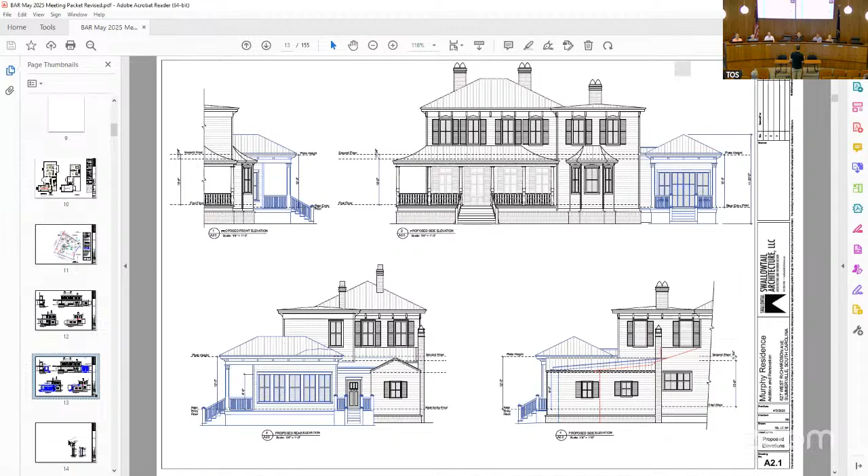Good evening, members of the board. Hope everyone is well. I think from the last meeting, the only question was the balustrade. Dr. Price, I think you were worried about the balusters looking chintzy, more or less. So we added a detail, and I've got a couple pictures if I'm allowed to approach.

This is actually what the picture is - this is my house on Houston Street. It's a little more decorative, halfway. I was thinking more in terms of attempting to match the spindles that exist on the rest of the house.

I don't know how others feel about that. What we talked about, right.

We had asked for something with the spindles with a more graceful shaping. These are still the square ones - I would not be comfortable with those going up. That was what we had talked about the last time we met with you. So, options for other folks?

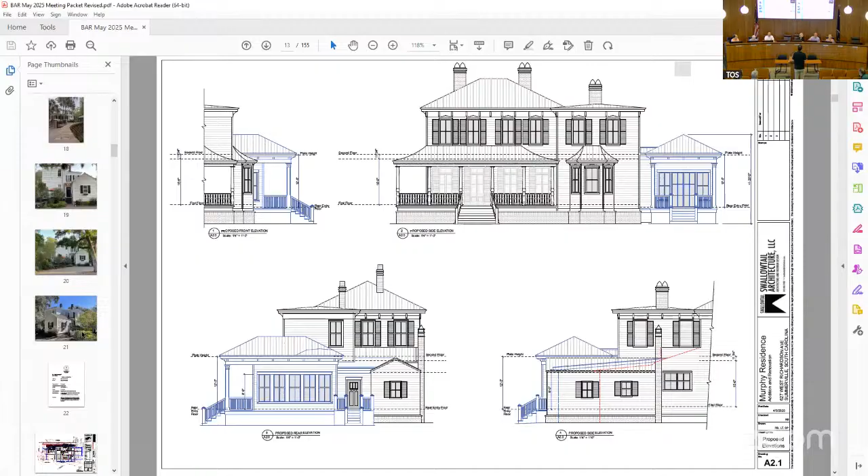He was asking when I was saying Berlin G Myers, what did that mean? Your flyer was just from Berlin G Myers - it could've been from anywhere. Yeah, it was off their lumber profile, their catalog, their molding catalog. I figured if she had a question, everybody else out there might have the same question.

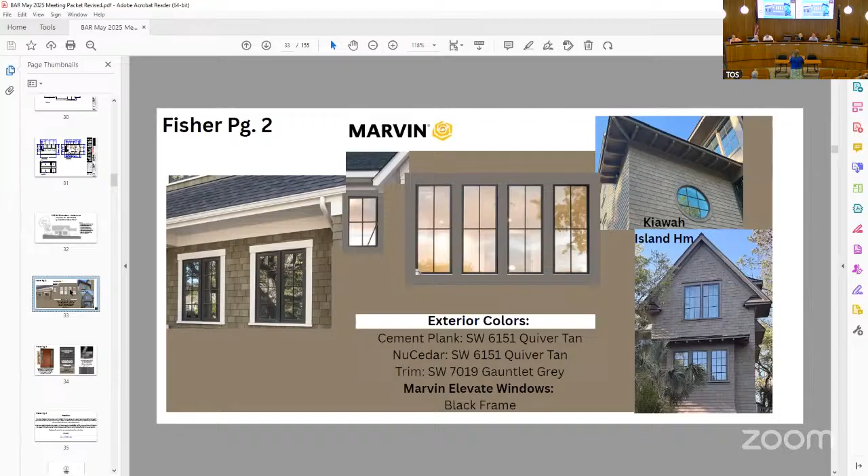Okay, so y'all go back to that elevation again. I think the NuCedar product is a good looking product. Thank you, I was wondering though, see how it kind of continues all the way down to grade in these elevations? Otherwise that band would need to continue all the way around. Yes, potentially, I think that may be more attractive, actually.

And if your builder's not liking it, would you mind that recommendation? Does that bother you? No, we would. So your recommendation is yes, as their recommendation, or like this?

There's a reason that structurally they had requested it not go all the way to the ground, and I think it had to do with the potential of wicking or moisture. So their concern was that it went all the way down and there's access to moisture. So they had asked us to bring it up to be consistent with the stucco foundation on the elevated slab - I mean, the raised slab.

Hey, can you go to the front elevation? Tim, are you asking that the stucco comes up? Yeah, so see that band right there - that band would continue across here, right here, so the home would come right underneath those windows. And then go to the side elevation 27 again - the same would be true here, and the same would be true here, so just all the way across.

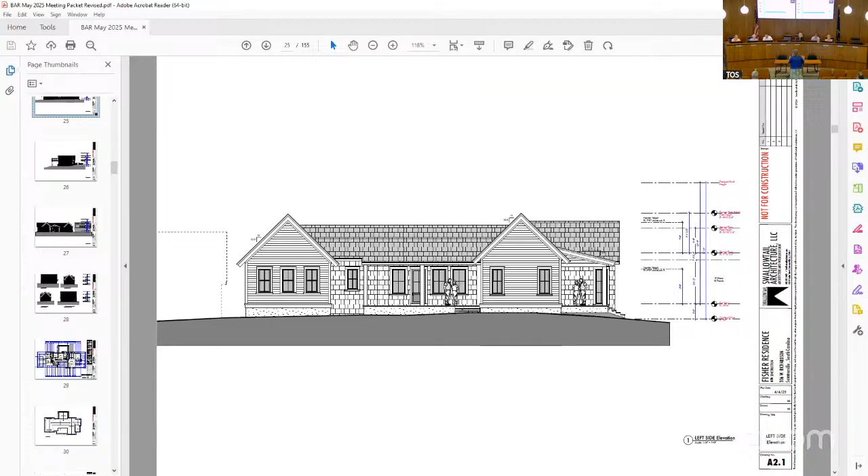Where's a picture of the fence? Page 24, you can see it. But you can see a little bit of that one right there.

Is there better detail or is that all we have? That's the only detail that we have. It's something we can certainly detail out and get to Remy.

What is the material of the fence? The fence would be wood or composite. We'll price that out, but it'll be the color of the house, the brick post.

Then I'd really like to add, not anything crazy, but for the fence, it'd be nice to have maybe a little something nice, some hardware on the gate.

Does the fence go around the whole backyard, or is that excessive? It goes just around part of the backyard - the front and then down partial on the left side until we get to the trees. We've got to yield to the elm tree and some of the other trees over on the left side, so it would break, then pick up and tie back in to like 2/3 on the side.

I would like to see more detail on the proposed fence in terms of the size of the horizontal members, but that doesn't preclude everything else being approved.

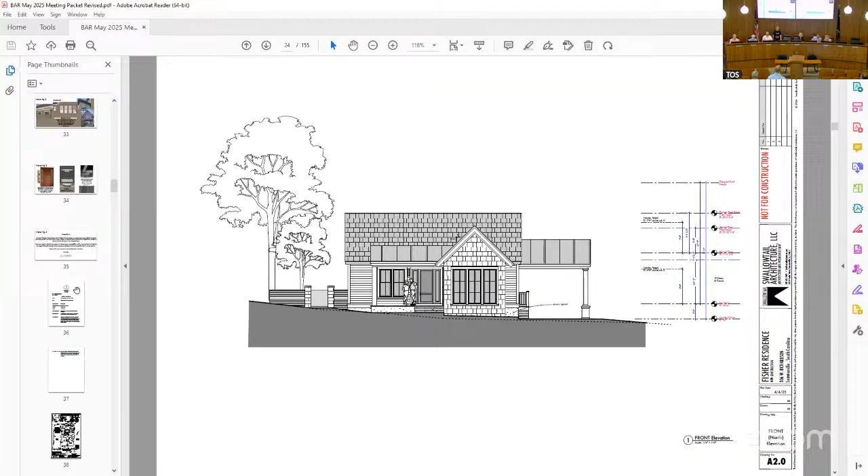Good evening. Good evening. I am back again - took me a few months hiatus, had a lot of stuff going on. But you guys wanted a little bit more detail on windows and doors, trim and everything like that.

I also have a set of plans that I purchased, but right now they're going through Crosby Creations to actually redo them for South Carolina requirements for the permit. Just a couple engineering things changed on it. So I created like a 4 or 5 page summary of everything - the doors, exterior - and wanted to see if you guys had any questions on that.

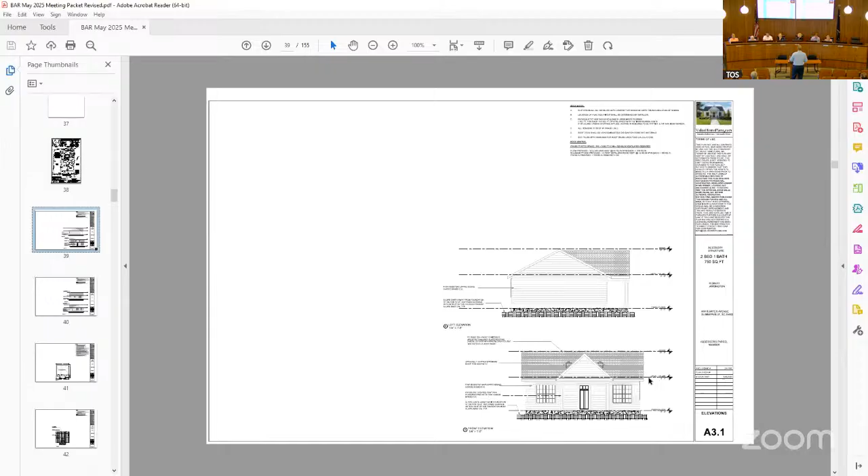I think there needs to be some trim detail on that. On some of your later pictures where it shows individual elements, you do have the trim detail, but on the line drawings they seem to be absent. On those drawings there, or? Yep, okay.

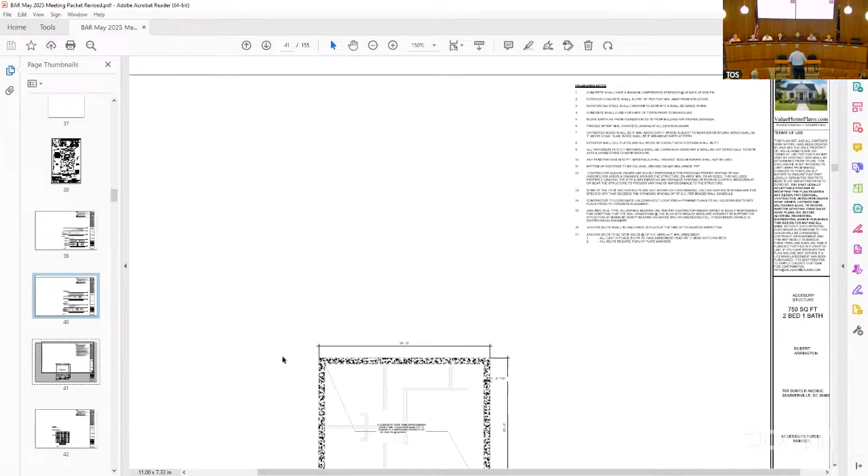For instance, go to page 40, maybe - well, there you go, you got it right there. So we're just saying trim details are on the corners and on the windows. You probably plan to do that anyway. Yeah, yes. So we just need some more detail on those.

Are you firm on where the cottage is going on your lot? I mean, I've got some play. I'm just studying your plan, and there's so much thought that went into making the house very symmetrical, looking from the front door all the way through the back, having the pool lined up so beautifully. But the cottage is off center.

It is, and it's really because of that tree. I wanted it to be center, I promise you. My wife wanted it centered too. But it gets really too close to the root of the tree, and I just didn't want to.

I don't know what's over there on your lot. The back left corner is the lowest on our lot, and it's kind of wet most of the time. There's some river birches that grow there. I mean, I could always fill it up and do it there. I'm not really locked into that. I can move it to the other side, just a little bit more land work to do.

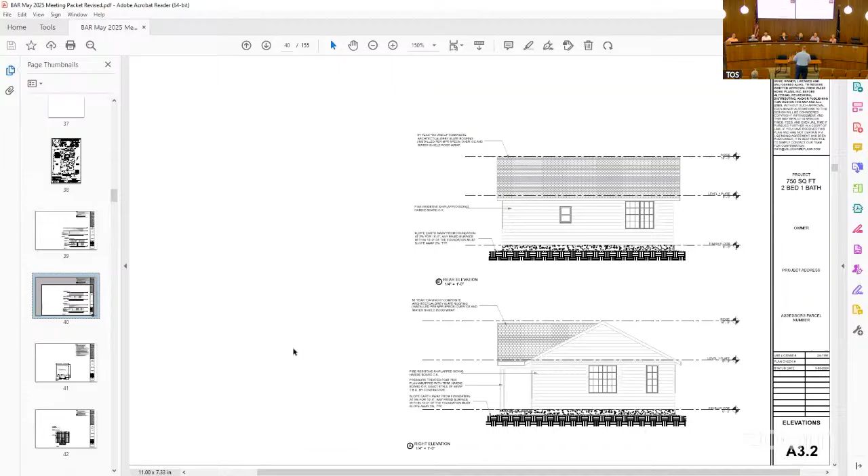I will second your motion. Was that a second? It was a very quiet second. Beth, yes. Kim, yes. Jane, yes. Rachel, yes. Kimsey, yes. Nancy Jean, yes. And I also, yes. Thank you, guys. Thank you. Good luck. Your roofing. All right, me too.

Okay, the Summerville Museum. Hi, good evening everyone. I was here like 2 months ago for approval on my own personal house, so it's good seeing you all again. I'm with the Summerville Museum, 100 East Doty Street.

We and the town have put in a fair amount of money here in the last year to do new flooring, new AC, and we've put in a number of new artifacts and displays. So we'd like to share that with the community—that's what we're proposing.

We went ahead—although, having been in sales, I'd love for it to be bright pink so you just couldn't miss it—but I think the green is more subdued and fits well with the downtown area, and it'll still get our message out as we're hoping. I think it's a great idea to have the banners on both sides—that building does get lost, it's just brick, and gets everything else lost too.

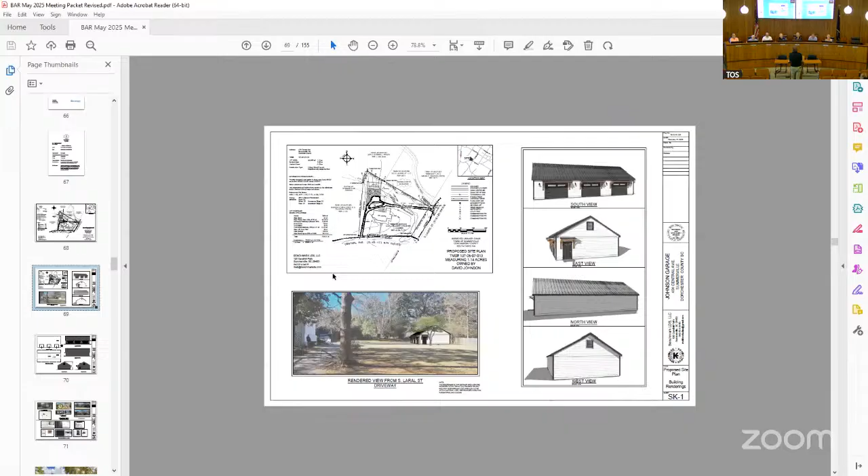That's just a 3-bay garage. It's basic, it's cut and dry. It's the way it is, the way it looks.

So, I do have a problem with the metal roof you've picked. We don't approve a metal roof with oil canning. It's the same metal roof that we have on the house. Of course, it's the old metal roof on the house. No, we require a flat panel with 1 inch standing seam.

Yeah, that's a flat panel. It's got the 1-inch standing seam. Well, the material description looks like it had striations in the metal. I mean, it's as close to a standing seam as I think you could get now.

But there are two kinds of standing seam material. There's one that has a flat panel and there's another one that has striations in the panel. We do not approve the panels with striations. Okay.

So I mean, we could change the roof as far as that. Yeah, I think it's not that big a price difference. That wouldn't be a problem with me as far as changing it to the flat panels. I'm just pointing out what materials we approve, and that's one area that we are pretty strong about, that in order to have it consistent with the old standing seam roofs, the panels are flat and the seams are 1 inch high.

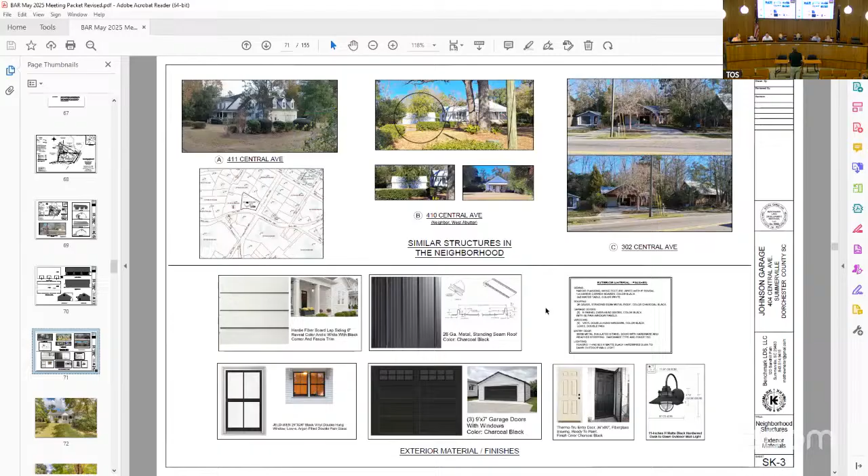Right, and I guess that to me is similar to a flat. That's not similar to a flat. Well, a lot of the ones that... Flat is flat. It's got a little, I don't know what they would call them, between the seams on those. No, we don't approve them. Flat is flat, and I don't think it costs any more to be flat.

It's not. I mean, I was just going by, I've seen some other ones and they have that same panel on the house that I've got now in different areas where they've replaced some of the standing seam that was there, and that's the same thing they've got on it. So that's why I was going with that.

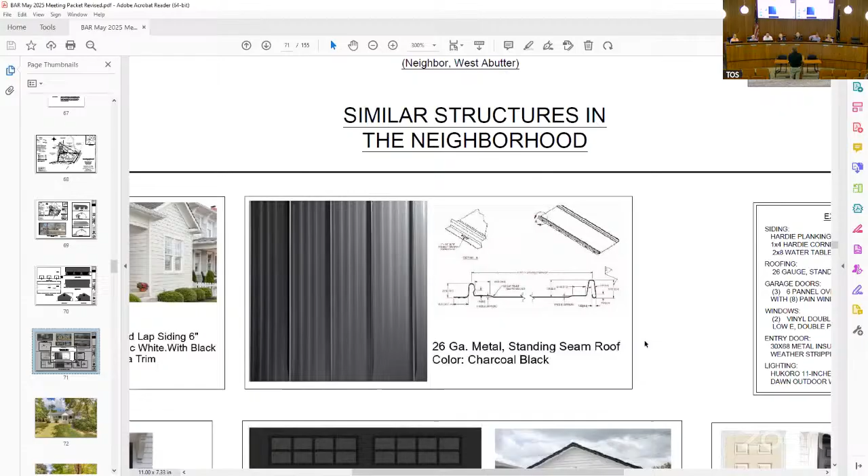Matter of fact, a lot of where they've replaced over the years, I think there's 2 or 3 gables on the house with that same exact tin, over the porch for one. Oh man, on the back.

I take a little different position on this garage. I agree with you on the roof, but I also think the garage lacks any architectural detail. And it is on Central Avenue, it's visible to the public, not hidden behind the house. Highly visible. This looks like a barn with garage doors on it. I think with a little bit of work it can look significantly better than this, and I just don't think the detailing is there right now.

So I'd like to see them put more detail in this to match some of the architectural details of the house. It's a beautiful house, gorgeous house. Pick up some of those details from your house so that this fits in and is equal in quality to your house. I just think this is...

Yeah, the garage that is currently there was approved as a temporary structure. It's just kind of stuck back behind the straight part of the house. Well, it is back behind. It would be hard to see it from Central or Laurel unless you go down the driveway.

But I mean, I thought the garage looked good as far as the detail, and as far as matching it up with the house. The one next door is exactly like that, except it's got silver tin and white doors. Same exact garage.

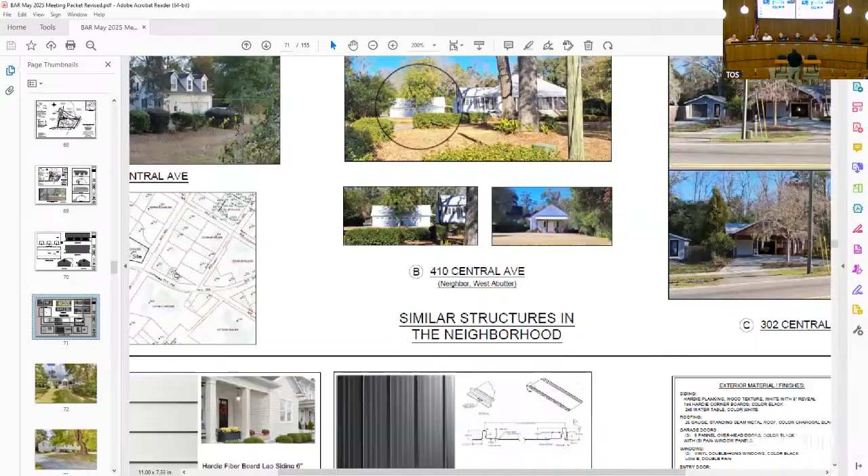Color's not part of it. Maybe the white colors are making them stick out more. You have the neighboring property picture. White doors, put some trim. Yeah, white doors, dark hardware. And that you could see from Central Avenue.

Hope you're well enough to tell. Right, remember that one, it's like I said, it's just basic. But with just a little work, you can come back to us and shouldn't have any problem. Okay, well, I'll raise the roof up a foot but I do like my colors. I hope that'll still go over.

It's some trim. Yeah, I think the garage doors wouldn't stand out so much if they weren't dark. Or it could just be that the roof is too low, and so the little roofs over the doors are black, the roof is black, and then there's the black roof and there's not enough space just between it. Maybe raise that up, and maybe the roofs black and maybe the doors white, makes them all blend with dark hardware on it.

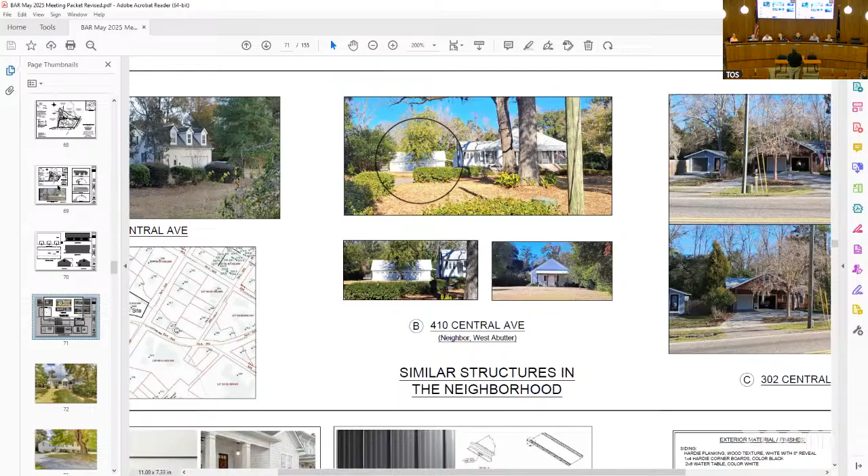And a lot of that might be into the way the drawing is, because it does have a cornice going around it with the 1x6. It might not show it, but it does make it look like it's sitting right down on the doors. So maybe I need to get the drafter to just redo some things on it. I think so, I think that's most of the issue.

We're saying put some trim on the doors and just some additional attention, make the doors carriage style doors. You know what I'm talking about when I say carriage style doors? Yeah, I'm a woodworker, so I know everything about wood. Oh God, you know how to make this thing look awesome then. Well, I could, and like I said, it's a lot of the drafting, the engineering of it, the way that he's got it, but...

It is gonna be a custom garage. It's not gonna be just like the one next door. This is a custom garage. So well, help us make it look great then. Well, we'll do it. I'll be back again. Thank you.

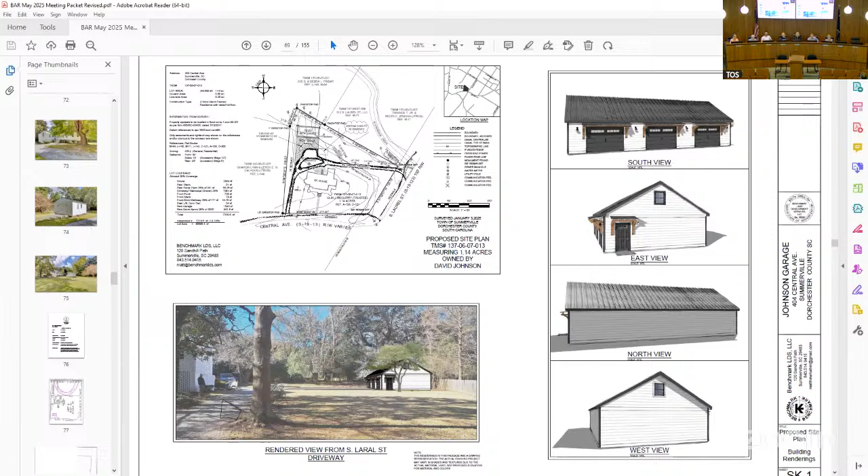Hello board. I'm Sandra King, and I would like to build a garden shed.

So I know one of the concerns is probably going to be that the proposed colors and materials don't match the existing cottage. What I was telling Remy is that I want to put an addition on the house, and then once I do that, I'd like to bring the house in line with the shed. Right now the house is a dark brown.

Are you tired of it? It's been that way very well, I just bought the house. And I love Summerville and I love the lot and I love the trees. But it's just so dark.

Super cute house, it's really cute. It's tiny, it's like 900 square feet. And I'll just go first here, let's get it started.

The shed, I like the shed. I'm not opposed to the colors being different. My bigger question is, you mentioned the roof, we probably need to talk about that, but you've got board and batten. You mentioned that you wanted to change the house to match that.

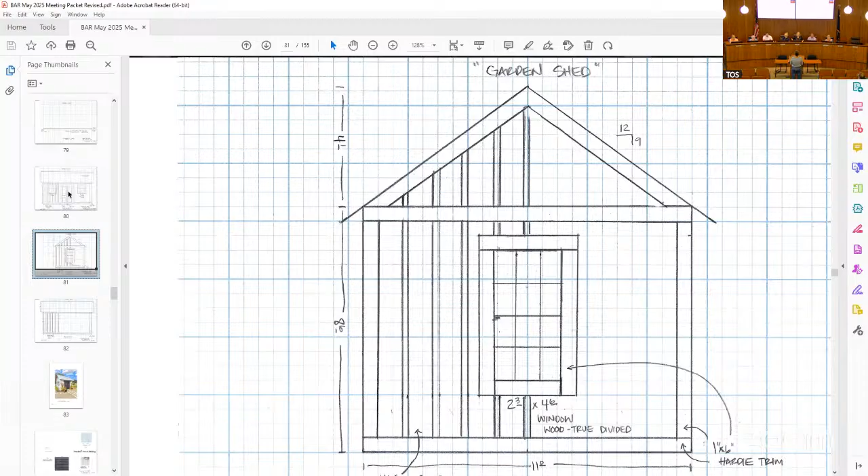Would you be opposed to the windows matching in the front? Are you putting like a bench underneath? Is that what you're thinking? Yeah, it's for storage, so those would be fixed sash on the front. Yes, I'd probably make them so that I could open them this way to let air in.

I understand, I'll put window boxes on the front of it. And simulated divided lights? No, true divided, better. Absolutely, I'm looking for old historical windows right now. Remy, could you show me the site plan?

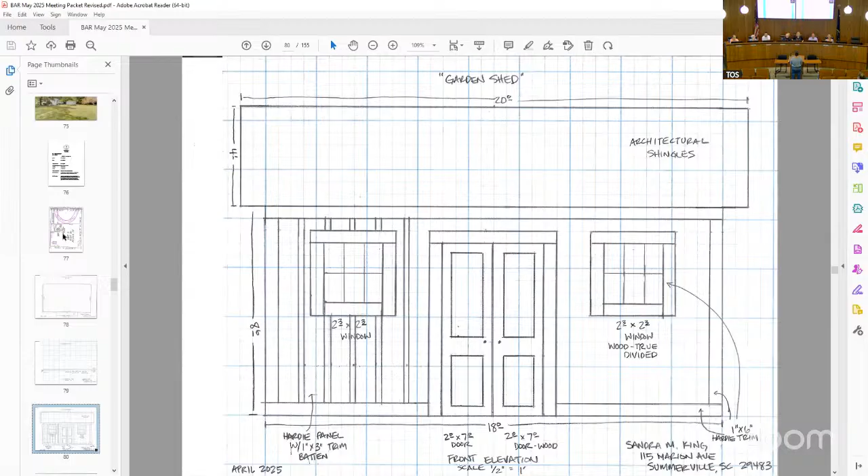So I'm just trying to understand, when I'm looking at this, I'm going to see the front view and part of the side view. So I'll see little windows on the front and a longer window on the side, and the longer windows on the cottage.

Where are you going to put your addition when you do that? So see where the wood deck is on the house? Yes, I'd like to come out from there about 40 feet. And go into the middle of the property? Yes. Okay, so make it like L-shaped. Okay.

So you can't see the cottage from the street. I hear what you're saying. It's pretty lit with azaleas. You inherited a huge fence. Yes, I did.

I'm trying not to let it bother me. Approved and submitted. Yeah, yeah.

Allow her to choose between a shingle and a metal roof if she wishes. I'm okay with metal if you guys want to do metal, we leave it up to you. You prefer the metal? Okay, I think the metal would be nice. It won't be the metal for 100 years, really, but...

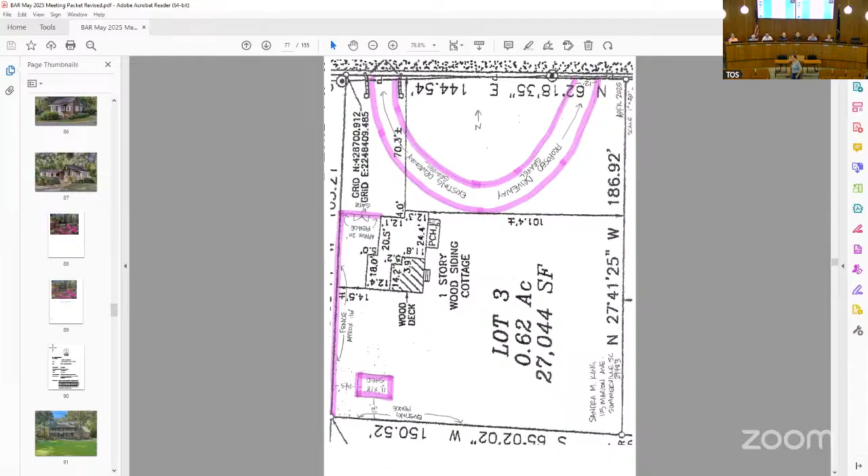Okay, 124 Dorchester Avenue. Good evening. How's it going?

We are proposing to do a replacement window project at 124 Dorchester Avenue. I'm with Window World, and we're looking to put a vinyl replacement window in the home. What's in there now? Just existing wood windows.

I can't tell from the photos, do the windows have divided lights now? They do, don't they? There's two in the dormers up top that currently do, and those four that look like windows on that second floor are actually doors. Oh gotcha, that's what I'm looking at. Those are doors.

So the 1, 2, 3, 4 down low, along with many others throughout the home, is what we're proposing to replace. I believe those dormer windows were not, you're not replacing those. But everything else, yes, all the other windows in the home. And it's all going to be 1-over-1, just a clean, clear plain view in the top and bottom sash, like for like with what's in place now.

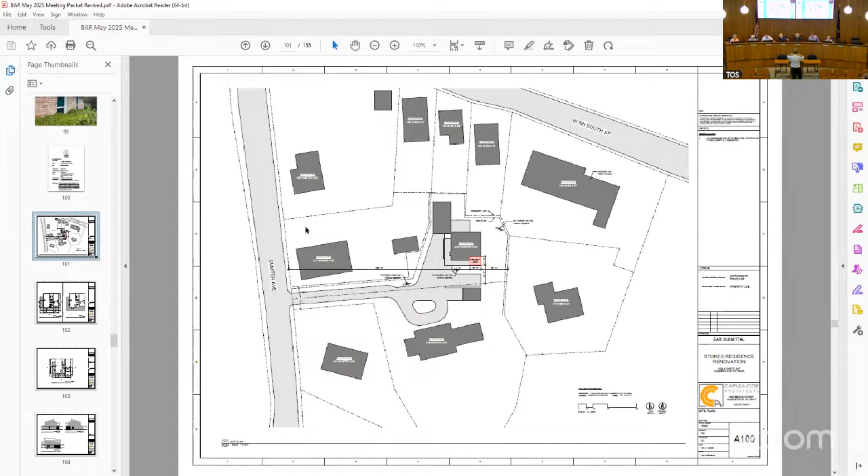The footprint will be the same as it is now. Yes, it's just closing in a portion. There's a 14 by 12 covered portion of the porch that we would just be filling in. So the footprint stays exactly the same.

How are you making it waterproof? You've got an open deck, you've got a deck above. We would have to coordinate with a structural engineer, of course, but we'd probably sister the floor joists and then add flooring on top of that.

We'll have a waterproofing membrane on that deck. It already actually is - they've got a ceiling on the porch, so it's waterproof, like a... I don't know the exact name. I'm just trying to understand. Thank you, I appreciate it. That's good.

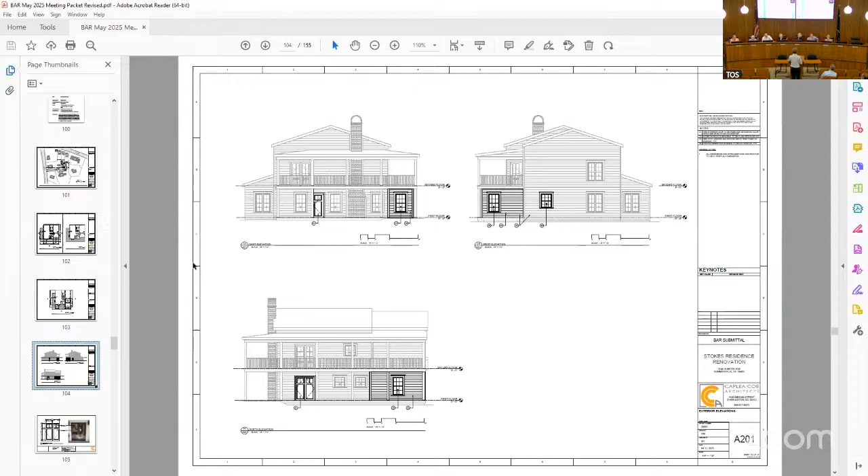I saw where you were replacing some doors. Correct. The owner would like to have added security and privacy to their house, and so our proposal swaps these full light doors with doors that would have additional security and privacy. We still want to maintain the stained wood and match materiality as closely as possible.

Any comments? Nope. Have a motion? Could I add one thing? This meeting, I requested it for BAR conceptual. Could we make a motion for BAR, the final approval? I'm not sure - is that ok? Lenny? Yeah, if the board's comfortable making a decision, you can make a decision on it.

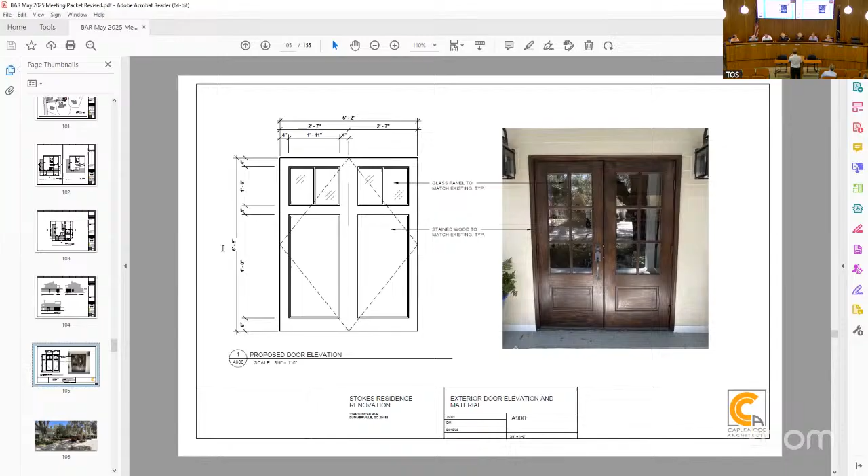I'll make a motion that we approve the change to the door and the addition for final approval. Second. Okay, Beth, yes. Tim, yes. Jane, yes. Rachel, yes. Kimsey, yes. Jean, yes. And I, yes, also. Thank you so much. Good luck. See you.

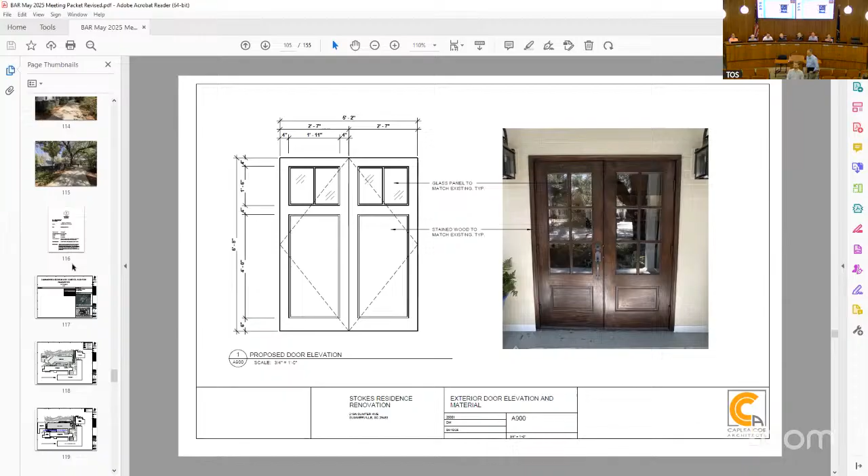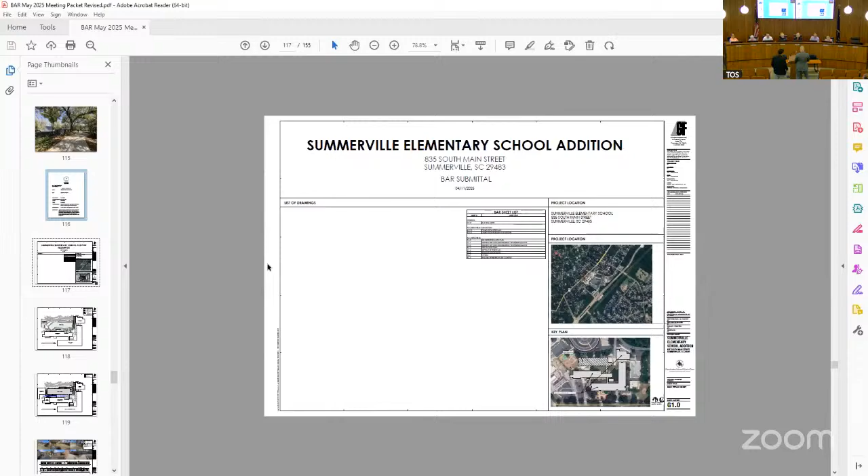Now we get to 835 South Main. Sure, guys. Yeah, so I'm sorry - hi, I'm Michael Kaneda, I'm with Greenberg Farrow. We're the architects with Work District. Had here tonight, our project designer is Jonathan.

If I may, if we could kind of walk through the project and just flip through some of the pages to better explain how we got to where we are. So I'm going to hand it off to Jonathan. Hello, good evening. So we actually have two action items - this is one proposal, but there's kind of two pieces to it. The first would be demolition of the existing wing, and then the second would be the proposal for the new addition.

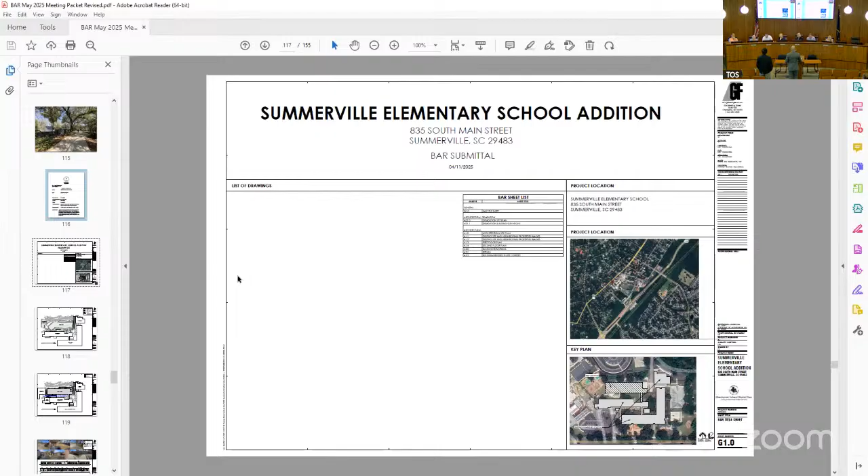So if we go through it, the current wing back there is about 14,500 square feet, 13 classrooms. It's getting old, dilapidated, so they want to demolish it and build back larger for more school capacity. The footprint for the proposed addition is generally the same, but it's 2-story - it'll be 34,000 square feet, 2 stories, and 24 classrooms with some swing spaces and teacher workrooms. Just kind of building up that school to be more useful for the current population, which is drastically increasing.

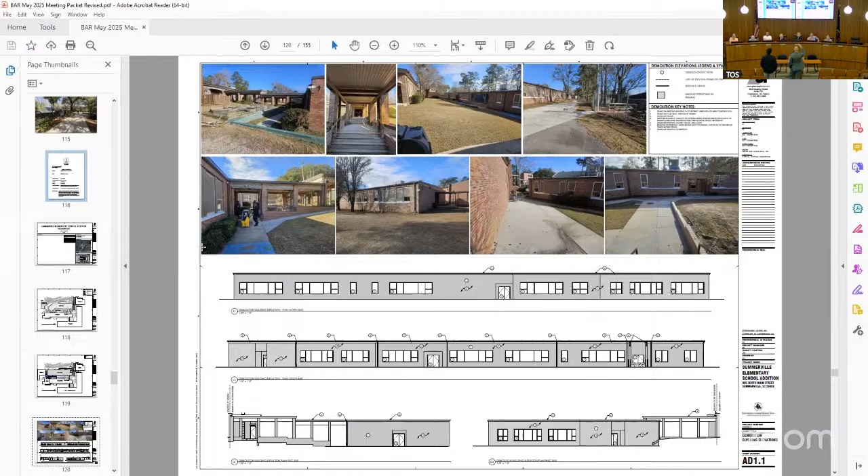So this is showing the demolition of the existing wing and the existing pictures of what that looks like. You can kind of see a little bit of the existing building to stay, and then the back wing that's to be removed, as well as that exterior connector piece.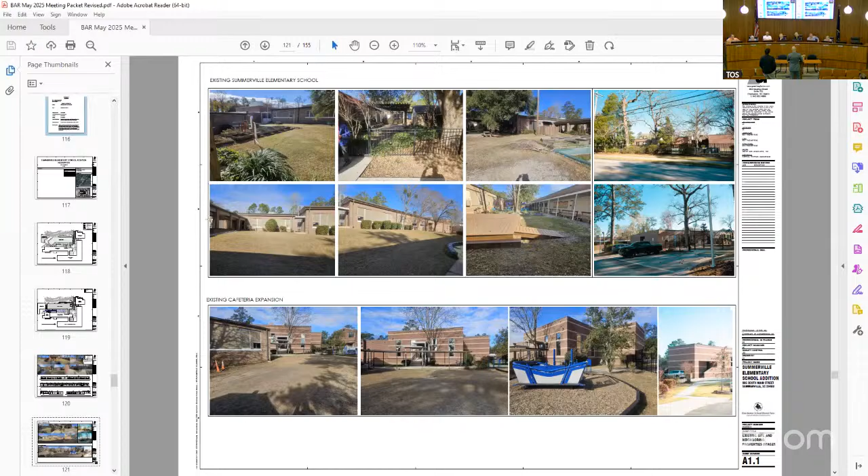Again, this is more just showing the existing photos of the complex. With this school, there's a lot of little additions here and there, got built on more and more as the years went on. So we have the main school, which is a bit older, and then as you can see on the lower portion, is the existing cafeteria expansion. That was originally for the high school, and now it's been brought into the main Summerville Elementary School. Then if you go to the next one, we show another addition, which is the multi-purpose room, done in 2014.

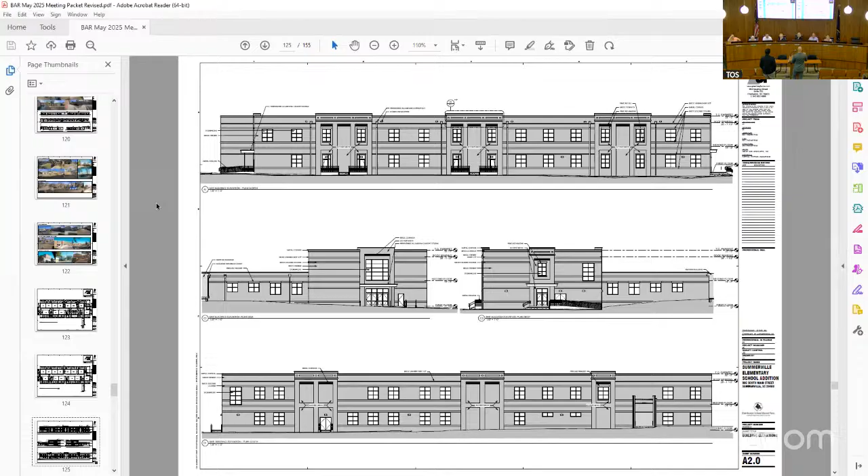So these are the proposed elevations of the new addition. The upper elevation is actually going to be the rear elevation, which will face the current bus loop of the school, so that won't actually be seen from Main Street. The lower image at the bottom is the one that faces South Main Street. Because of the building in front of this new addition, you really won't see much of it - just the very top.

In the middle you can see the two end pieces. The one on the left is going to be the new main entry where the bus loop students will come into the school. That's also where the current car loop goes in at the multipurpose area. And the right elevation faces towards the current district headquarters.

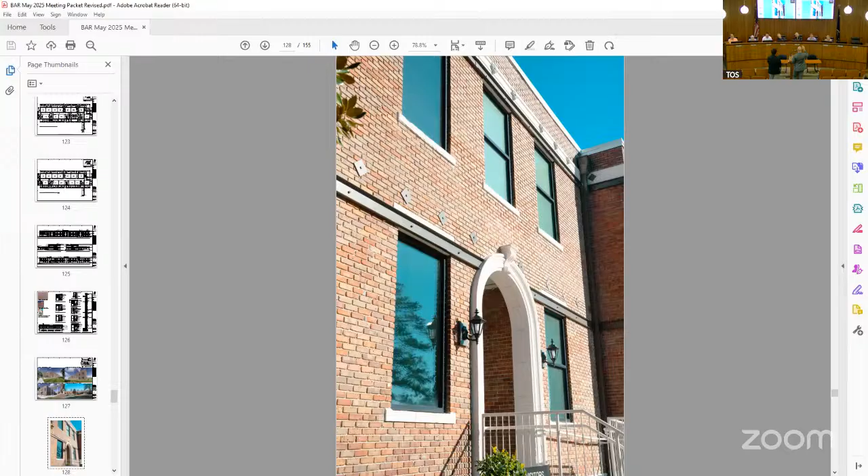Where will you be using some of those elements? Specifically the sills - the cast stone sills and the cast stone header - we'll be using those in our more vertical elements. If you zoom into the more vertical pilasters, you can see over the top of the windows where we'll be using that. Those areas are meant to be the more highlighted areas, and the rest will just fade away and fade back.

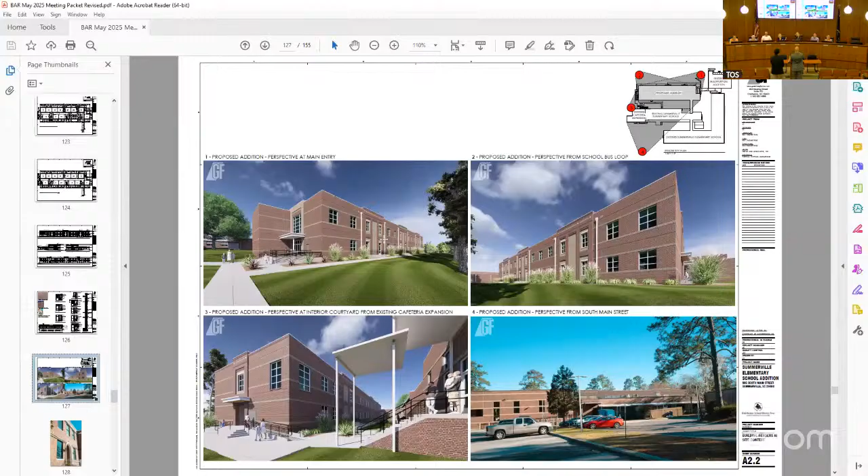There is a slope difference too. It slopes pretty far down as you go through the site, so the further you are, it drops. The actual school is in kind of 3 levels currently. You have the main level of the existing school, and then the next wing, which includes the cafeteria expansion addition - that's at another level, about 2 feet lower than the main school. Then if you drop again about 5 to 6 feet, that's the current existing wing all the way in the back. We're proposing to bring that up about 6 inches, so we're still maintaining that drop down. But because of that, with the 2 stories now, it only allows us to be slightly visible, as opposed to being really tall.

Visible, yes, correct. Could you go to whichever page it is that shows the cornice details?

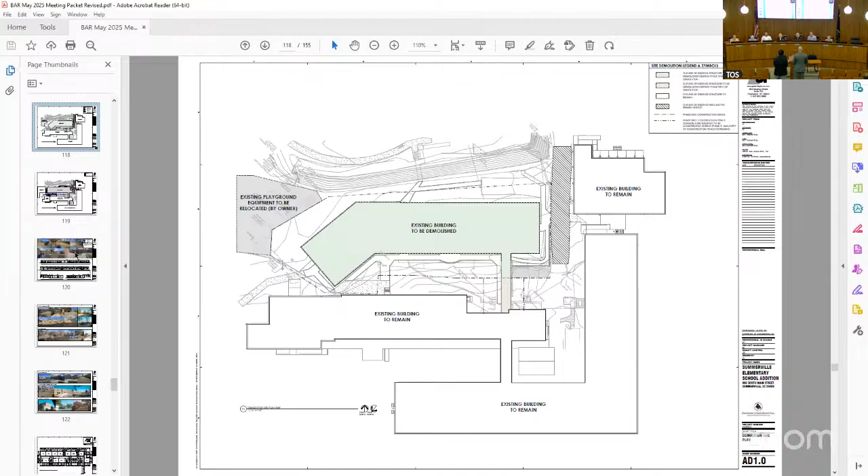I think it's a nice design. It blends well with the old school elements. Appreciate y'all bringing in some cast stone into it - I know it's a limited use of it, but done it well, I think. So I don't really have any comments.

You have the corridor from the old school going to this 2-story addition that will be enclosed. Correct, and it'll just be 1 story - the first floor will come down. That connection, because of the drop of about 5 feet, will actually ramp down the whole way. So it's not a step down, it's handicap accessible. Correct.

Is there a picture of what that looks like? It's in the rendering - if you go to the elevations you can kind of see it, and then we can show the renders. So if you look, you have the 2-story main piece in those middle images - that is the main school, and then the lower 1-story piece is the connector.

Right, and that's just solid masonry. Is that connector just masonry? Is there no windows or anything? No, there will be storefront windows in there. Is that where it drops down in the middle images, the little drawings? It drops down, correct, right there. Oh, that's it. Thank you. Oh, that's okay, yeah, correct.

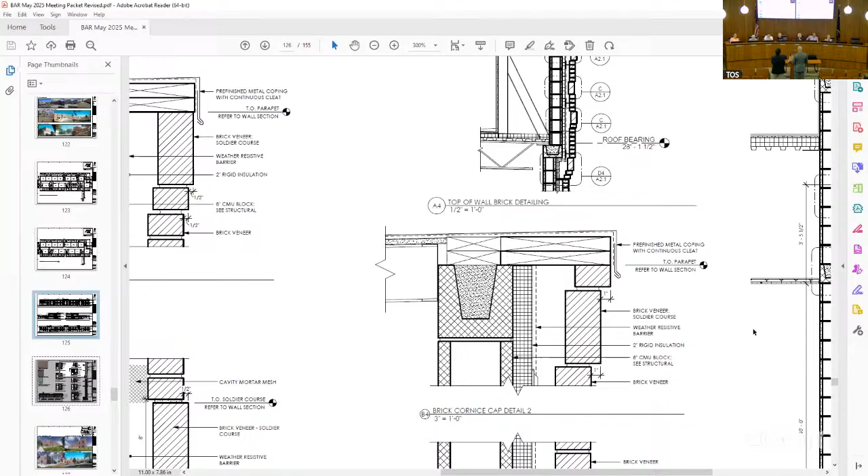I guess I was looking at the stone cornice on one of the other buildings that projected a little bit more. Can you show us that? David, do you remember where you saw that? Well, look at the third color picture down.

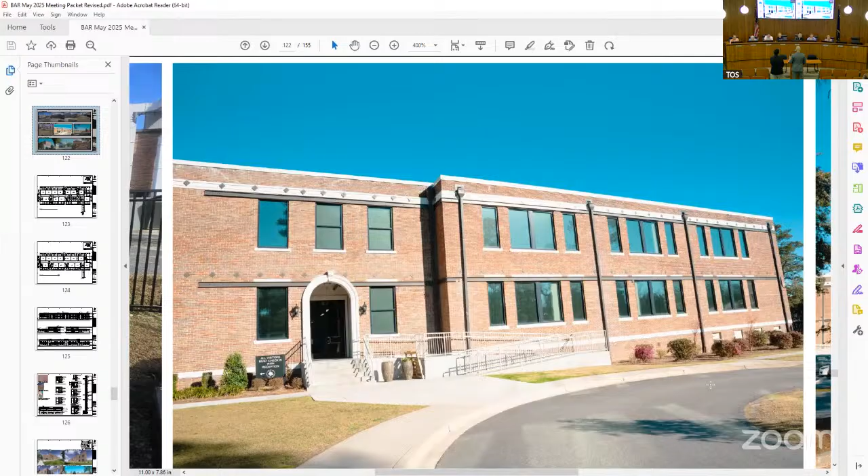Zoom in on that middle picture, if you don't mind. It's got that big steel bracket underneath, so it's kind of hard to tell what's going on there - is that a metal cap or a stone cap? That's going to be a stone cap, but it's over top of that aluminum channel. But yes, that top does look like a stone cap. I think that looks nicer to me than just a metal cap. That's small.

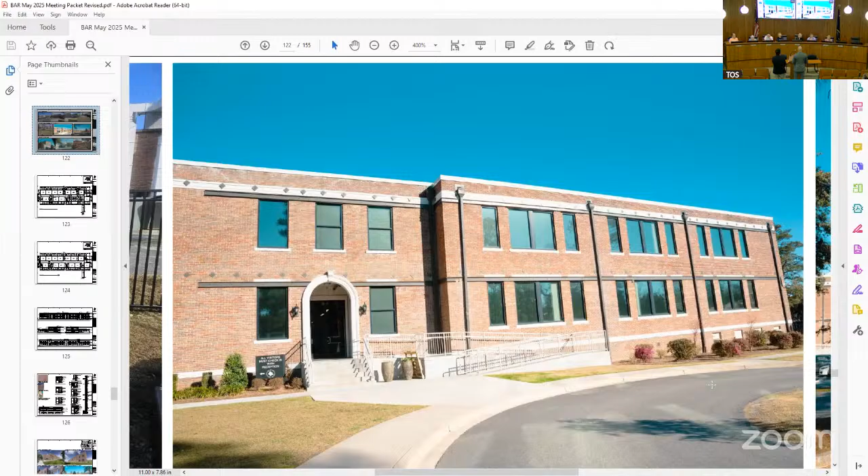Could you go back to the proposed 3D renderings they had, so you can see those details along the top band, but also on the porticos that you've emphasized.

So you're looking for approval of the demolition of the existing wing, and conceptual approval of this. Is that what you asked for? If it's possible, we prefer final, if it's okay with the board.

Just for me, I am not ready to vote on this. I think this is a huge project. I know the original building probably needs to be demolished, and I really don't have a problem with that, but as far as the design and all, I would like a little bit more time to study it. I don't know how everybody else feels, but it looks very sterile to me.

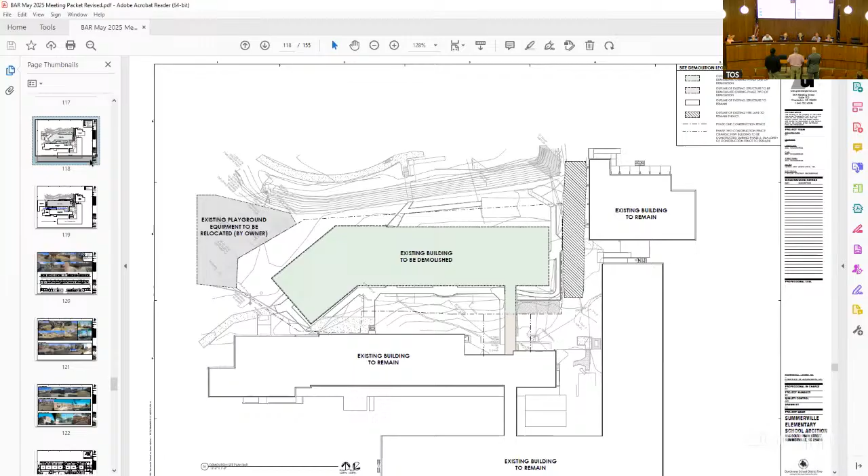I would like to see a site plan where it relates to the existing building. I think we have the site plan on there. That should be on the first several pages. If you could go up to the very first page and zoom in over there.

Can you go in and label? Okay, like that, yeah. We can extend it, we can make it bigger as well to include all the buildings. I guess the question I'd have is as far as printing it goes.

When we print it, it's gonna be very small. If we do like an 11 by 17, it's gonna be even smaller. Do you want a full size? This isn't large enough. Correct, yeah. So if you want a full one, we have sheets in 30 by 42, they're very large.

We don't need 7 of those. No, yeah, we don't. I'm fine, I don't need one, but I'm gonna actually go look at the actual spot. So then maybe 2 copies? Does anybody else want one? Yeah, I don't need one. Okay, 2 copies. If you'd like, we can also walk you through some of the spaces if you go back to the floor plan.

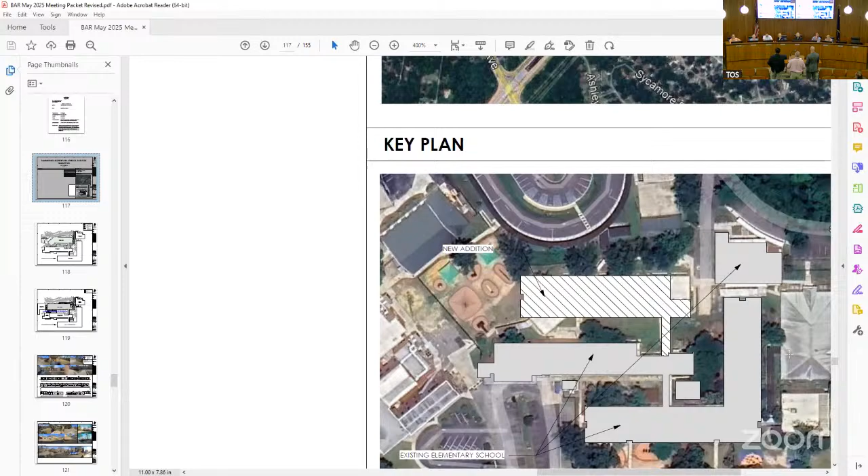There's a lot of acronyms that we use, like all that stuff in the very middle right there where the cursor is, for special ed classrooms, and there's a lot of acronyms in there. Some of them, even I have to look back to figure out what they are. So if you're unsure of what you're looking at, please ask questions.

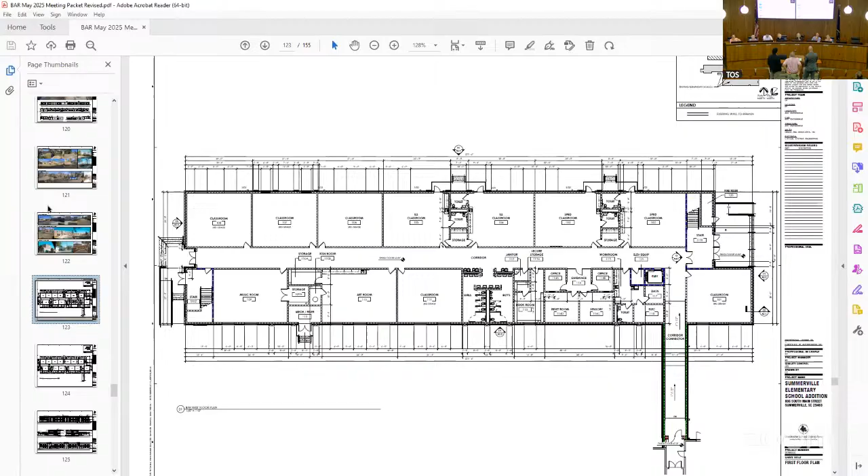So maybe on the elevations, there's a place where the windows are all symmetrical except one corner is missing. Why is that corner missing? Which specific corner? The far corner, which has the large windows, that's actually the stairwell, so that's to bring more light into the stairwells. Right where his cursor is, that's also a stairwell. So where you're seeing there should be a window is actually the middle of a landing, so we don't want to put a window there.

If you look, the landing would be with banding, with striping. The window would be on the first floor. Correct, yeah, the windows would be there, and the landing would be basically in the middle of where that window would be. Oh, I got you. So instead of seeing someone's feet and part of the landing.

To give you more information, all those big windows in each of the classrooms are about 6 by 8, so they're pretty large windows. Each classroom has at least 2 windows, and the special education rooms will have a door as well, so there's plenty of light coming into those classrooms. We're also hoping at each of the ends we've got windows to bring shared daylighting into those corridors, trying to bring that light in without going too crazy with the budget and doing all full glass walls.

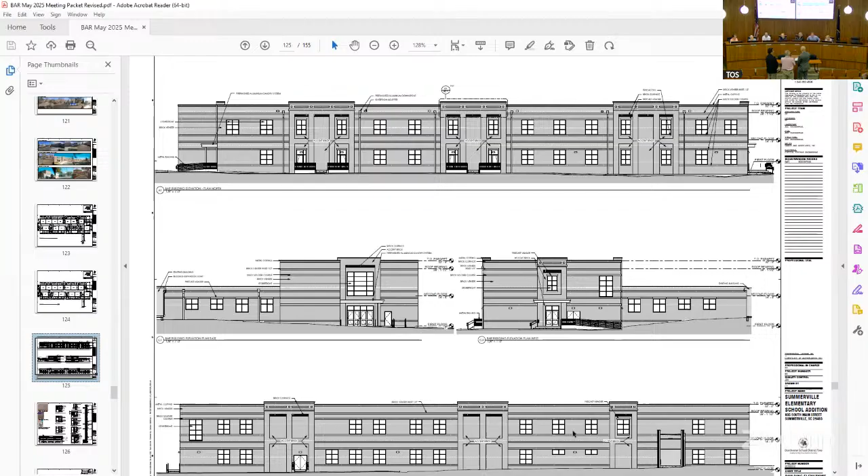Yeah, so it's quiet rooms. And are they facing into that space between the two wings? So yeah, it's right there, it's like a sensory room. That's it, so it's more like a guidance area, so when students need to be pulled out of classes, they need to calm down and be in their own kind of space. Those are the spaces that are for them. And so we need higher windows so they can't damage the window or injure themselves.

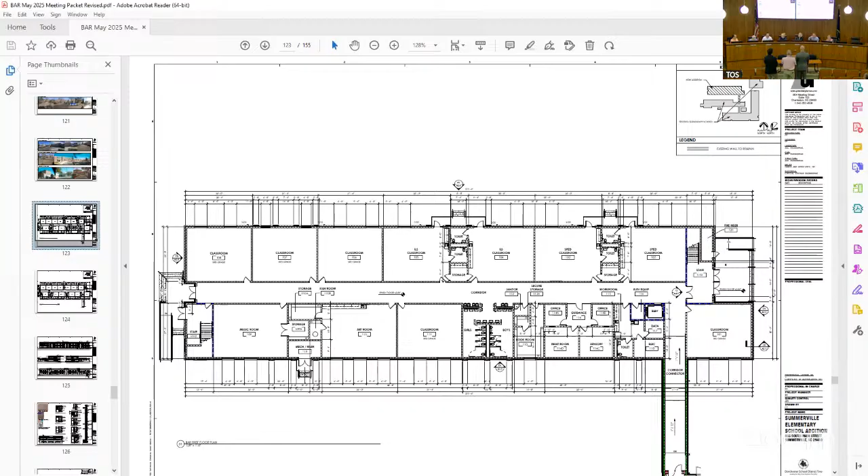Can you show me the color elevations again so I can see the white? And again, oh, I see. That is going to be in that kind of middle courtyard where not a lot of people will be able to see that. You'll kind of have to be in that space to really see a lot of those windows.

The next scheduled meeting for us would be the 3rd, which is immediately after Memorial Day. I thought Memorial Day was the weekend before. It is. Right, Memorial Day is the weekend before that. Oh, it is? Yeah, it's in May. They're not doing it the way they used to, the last 40 years. I think it's the last Monday in May, the 26th.

What's your start of construction schedule? Start of construction schedule is August 1st.

That'll give us time to get our building permit from the Department of Education and hopefully have all of our stormwater and everything else, start excavation, foundations, start our foundation work.

So it's a tight schedule for them, a 10-month schedule, a tight construction schedule for sure. What are the serious concerns anybody on the board has about this project? I do think it would be helpful for them to have any hope of making that; they would need to know those tonight and come back for approval with revisions. They would have to be pretty minor in nature. If they were major, there would be no hope of that. If they don't get our comments until a month from now, there's no way they'll make that August first start.

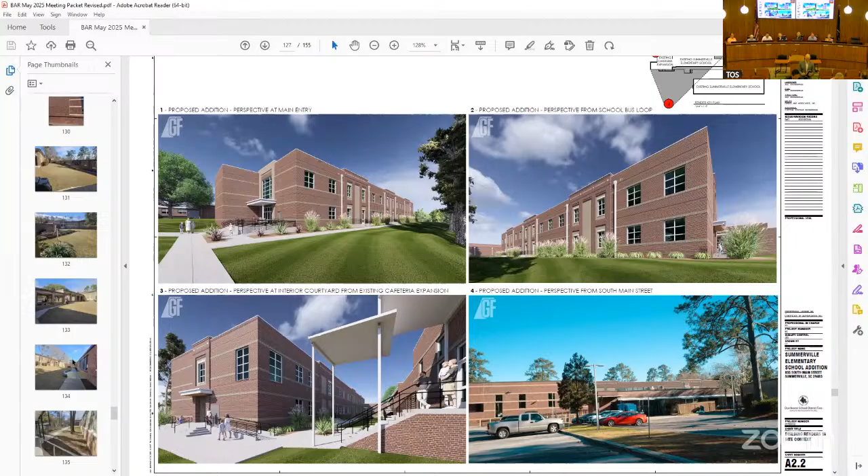Good evening, my name's John Nettles. I'm the Facility Maintenance Director at Summerville Baptist. We're looking to add a door from our facility onto our playground for our ever-growing preschool department, so we need more space for our kids. And they have to have an exit straight into the outside, so it's a requirement.

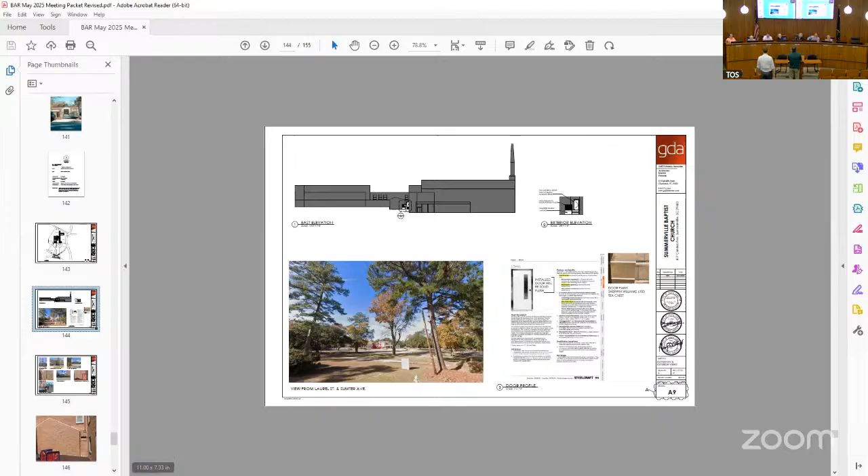They did provide an exhibit showing that the door will be slightly moved to the left here. I printed that out and forgot to bring it upstairs, so just a heads up on that.

You're basically gonna put on 145, you're gonna put a door there. Or in that 146, red square - yeah, right there to the left of that, right there. We're gonna brick in that wooden panel and that other grill and stuff up there and take all that ugly out, close that up.

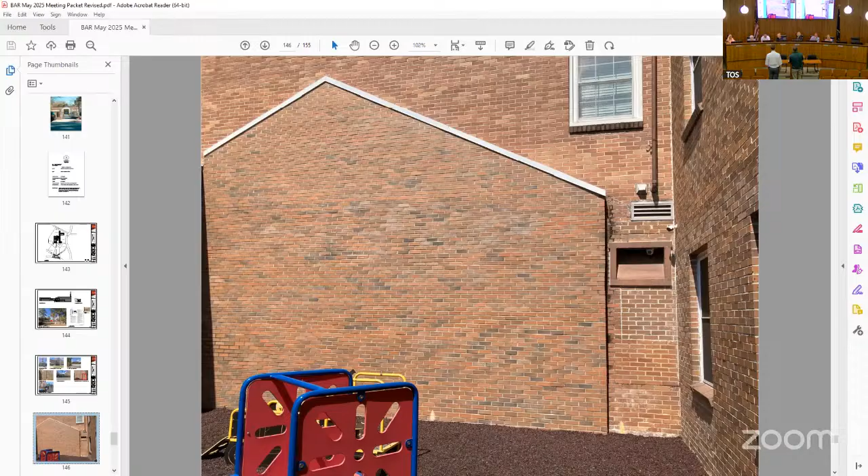Where is the door in relation, like in this middle photo, the existing playground? Where's the door? All the way back under that blue awning, way back. Have to zoom in closer. Yeah, it's way back on the very back wall, a little to the right of that roof line that was up there from the old - it was an old fellowship hall that was there, so.

Where do they come out now? What door do they use now when they go out to the playground? The playground, that's a new classroom is what we're trying to put in there. Oh, I see - and they don't have access to that or an emergency exit out of the building. Since they're 5-year-olds, they have to be able to get out directly to the outside. All the rest of those children exit right out, so.

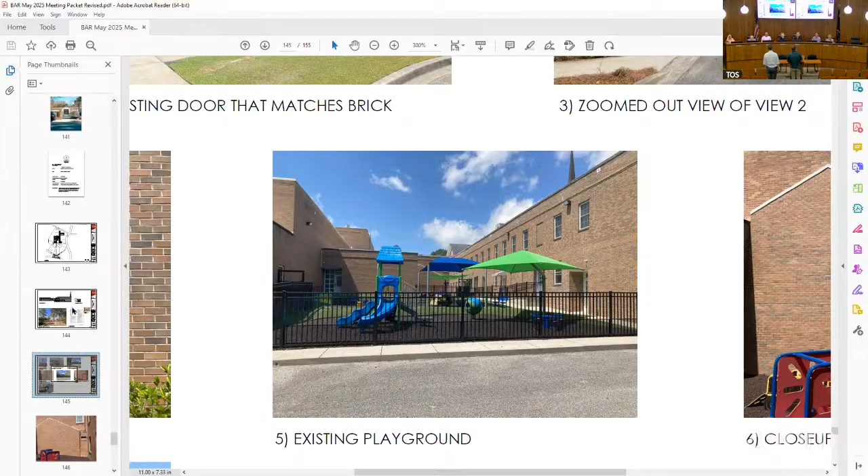And will it be a white door like the other doors are? It'll be just like the other doors along there, those white doors. Yeah. Any other comments? Is that what we got spec'd for it right there? Okay, hollow metal. So do we have a side light like that on there? I thought it was gonna have the windows like the others were. Okay.

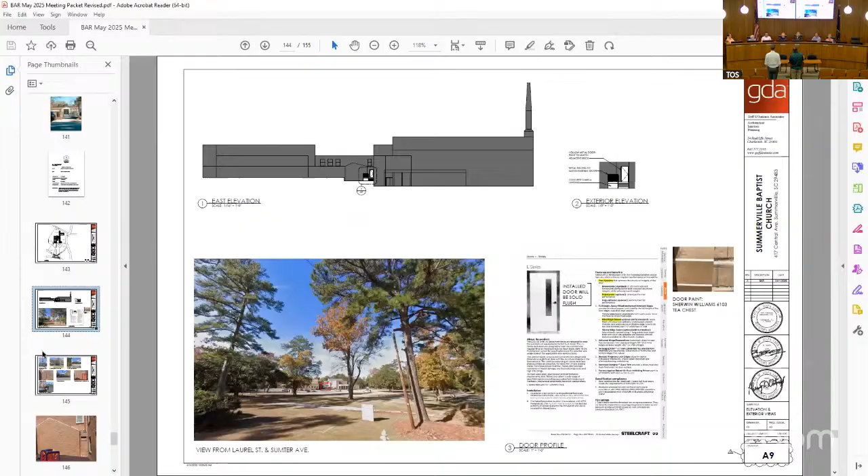There a motion that we approve it as submitted? Second. Okay, Beth? Yes. Tim? Second, we're doing the work, so I can. Yes. Becca? Yep. Kimsey? Yeah, yes. Nancy Jean? Yes. And I, yes. Thank y'all very much.

Sorry you had to take 2 hours for that. Yeah, you'll have a blessed evening. You too. My daughter, we go to church there, and she's- We have 112 East Sixth.

Well, good evening board, I want to talk to you about putting windows in the rear of my house. And I would like to say that this is not part of the original house - this was an addition that was probably put onto the 1890s house, probably in the 1930s. I'm looking to put basically maintenance-free windows in there, obviously energy efficient. You know, also we've kind of got a combination of different windows on this addition already.